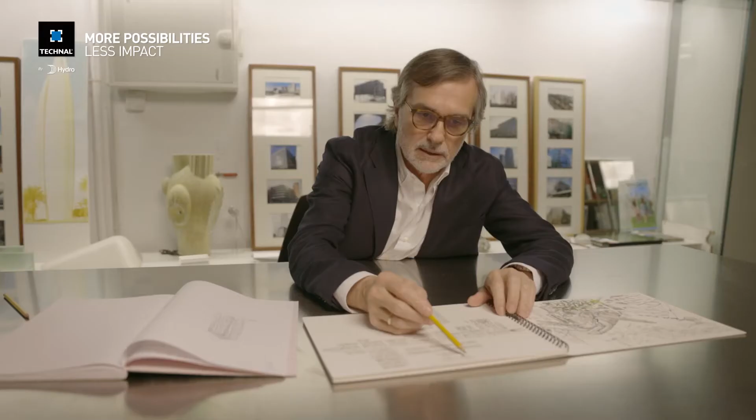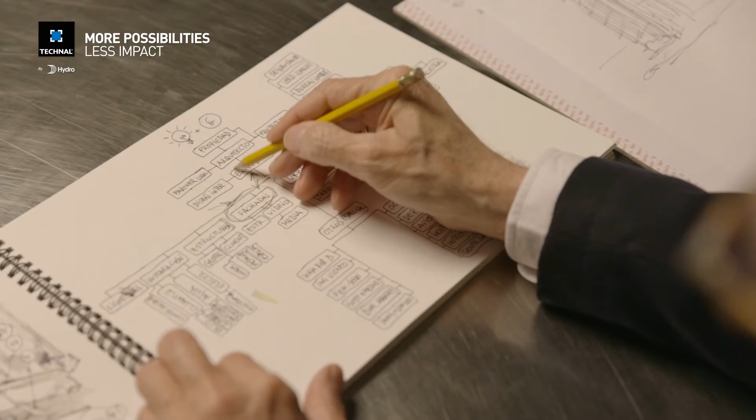First of all, I would like to introduce myself with a simple sentence. Yes, I'm an architect, but an architect with a special profile, because my team and I have developed more than 180 buildings over the last 30 years, making credible the ideas of others, sharing them by teaching in different universities, and especially drawing.

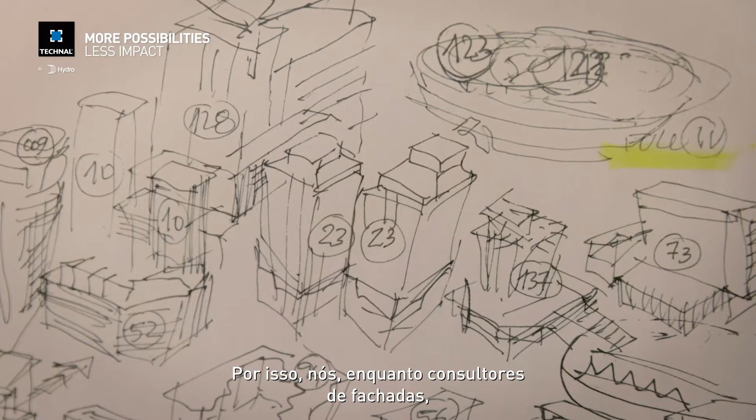We have a small and very dynamic office based in Barcelona, from where we offer facade consultancy for the best architects around the world, especially even Pritzker Prize winners. Usually, architects imagine the result and the engineers create the process, or explaining it another way, architects think what and engineers know how. So we, as facade consultants, move in an equidistant position between both, and our projects are developed with a simple philosophy: technique and form are the same.

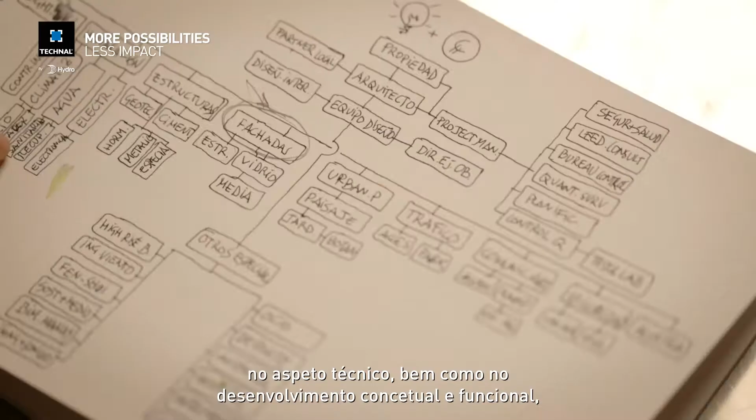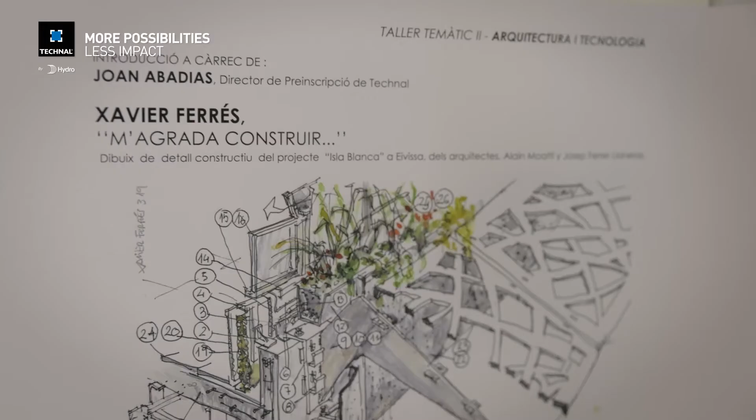Every day, more and more architecture studios focus their work on the level of definition of the facade, the technical aspect and the conceptual and functional development, leaving the detailing and the specific elements of the facade delegated to the technical specialists from the industry. So the most common way to face the problem of technology is to claim the support of brands that help us develop the most ambitious projects. Our role as consultant, in addition to the above, is to think and advise from the strategic development.

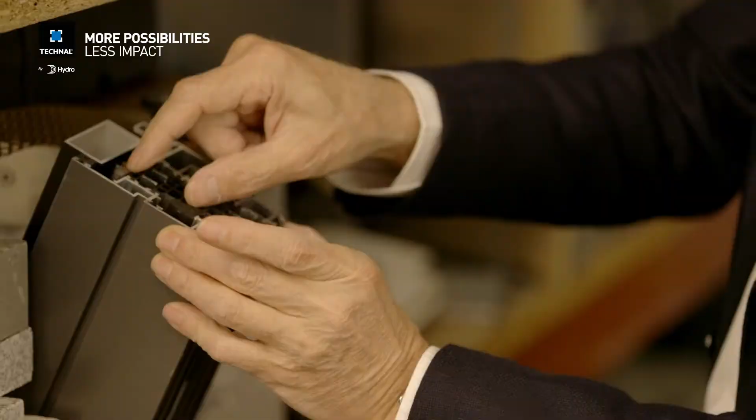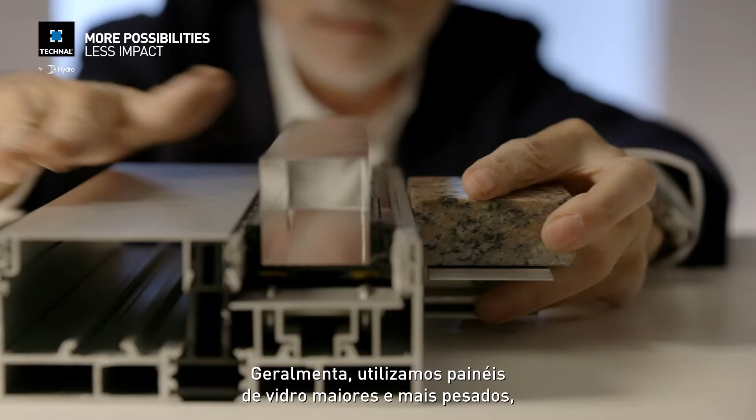The present leads us to consider energy as one of the engines of evolution, and this has been the case for decades. However, this contrasts with the need to work with large formats and glazed surfaces, so the so-called window-wall ratio increases, and the energy performance of the facade is in contradiction with the dimension of the transparent areas of the buildings. On the other hand, this need to increase sizes requires larger profile dimensions, engineered for bigger and heavier glass panels by means of innovative connections and reinforced glazing support.

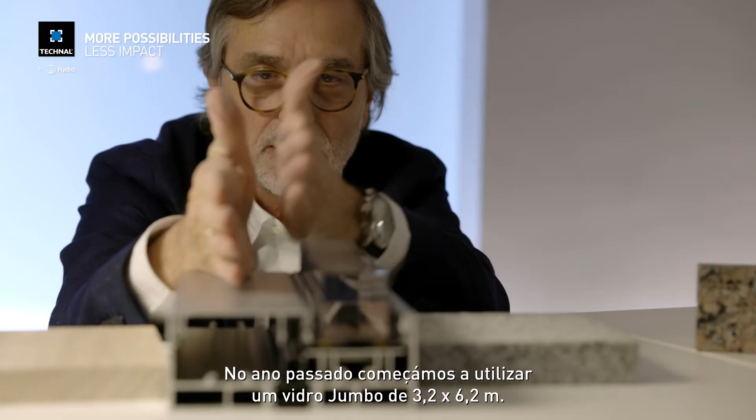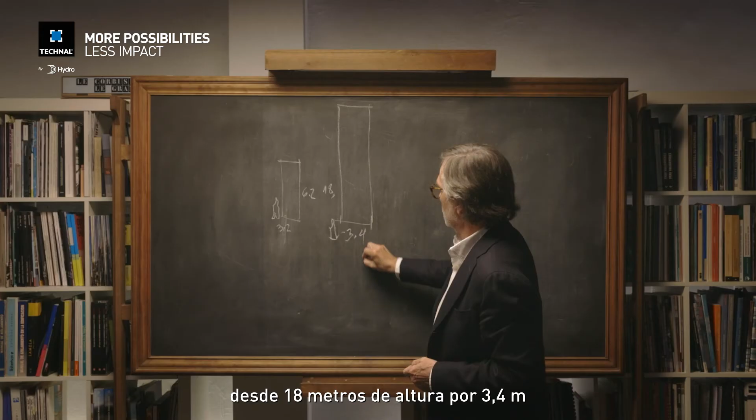Last year, we started with a jumbo glass of 3.2 by 6.2. Actually, we have, with different suppliers, glasses of 18 meters height by 3.4. So, obviously, we can use these sizes of glass.

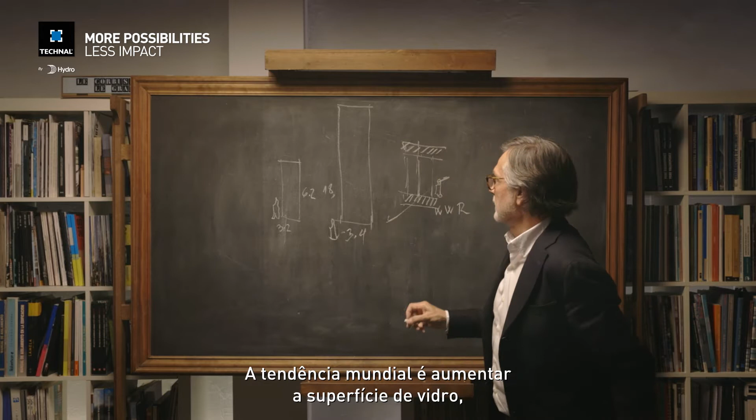The trend of buildings around the world is to increase the glass surface, but balancing with the window-wall ratio, because we need to balance the comfort of the users, contacting directly across the glass with the landscape, the sea, the rest of the city, in order to respect the rules and regulations in terms of energy savings.

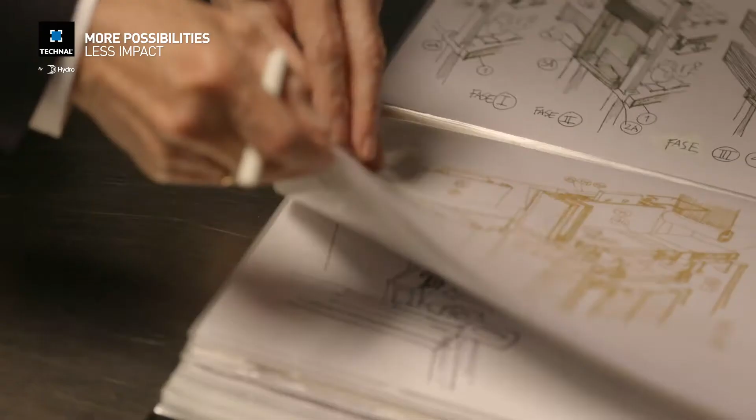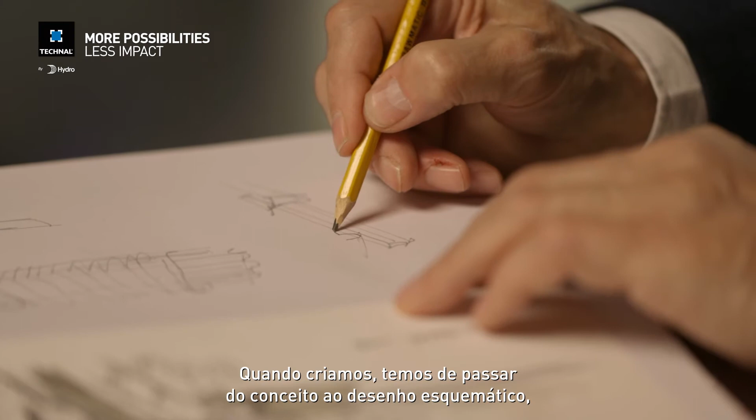The only way that I can explain my experience, my thought, my feeling about the technical decisions, the technical elements, is drawing. My brain is connected with my hand directly. When we are creating, we have to pass from the concept and schematic design to development and construction documents, trying to be proactive with the architects, usually our clients, in order to achieve the maximal fidelity to the original idea.

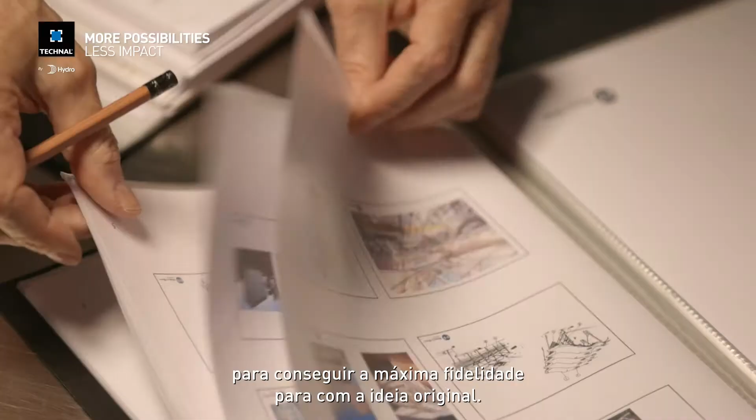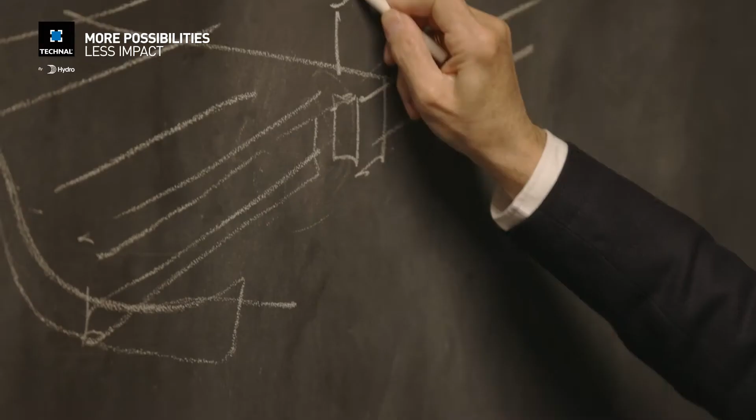For example, a building under construction in Barcelona, named Diagonal Zero. It's a multi-story building, I think 27 levels, with a special balcony. This is the original slab, because it's a huge modification of the building. This is the slab. This is the beam that we have to support. The level of the interior floor. This is the exterior floor, and we have a shape like this. This is a balcony, this is a terrace. The building is something like this.

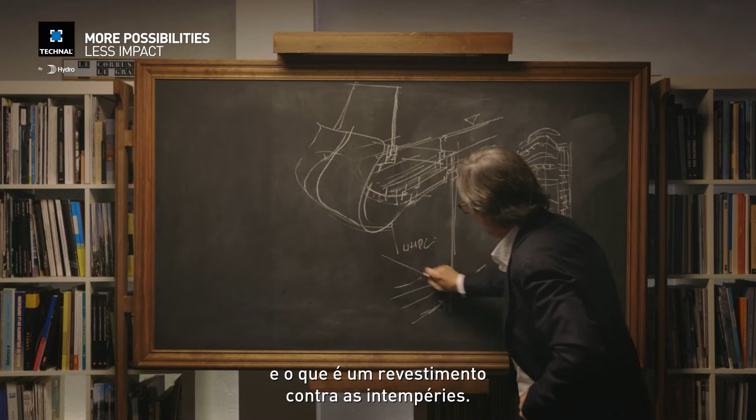It's more or less 110 meters, and all these balconies are here. And here, in the lateral facade, we have a typical curtain wall. It's a typical profile with spandrel and glass and windows, etc. The pass from here to here is very important to understand what happened. What is the slab? What is the structure? What is the weather line? In this case, with a sliding window, a huge one, maybe 2.50 meter height, and this is a part. I'd like to show this in color, but I think it's clear in order to understand what happens when we have to develop from the concept to the detail.

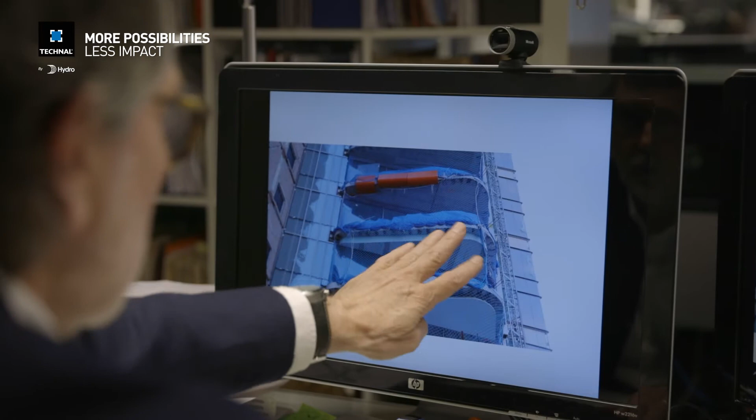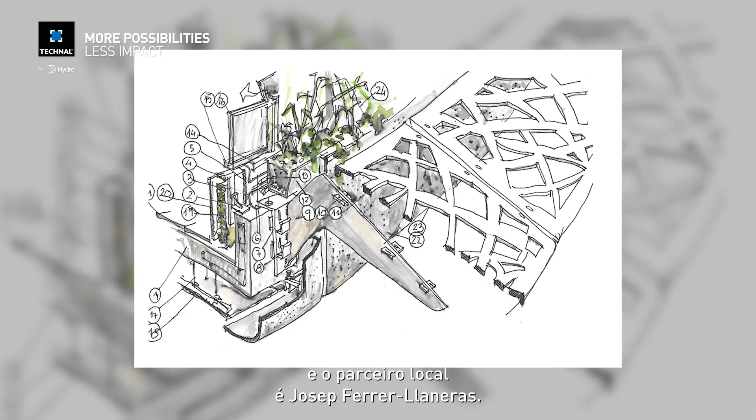The second case that I would like to share with you is a commercial and residential building in Ibiza, named Isla Blanca. The author is l'agence Moatti-Rivière de Paris. The project is led by Alain Moatti, and the local partner is Josep Ferrer-Llaneras. The main concept is a shadow device named voilette in French. It's an element qui vole.

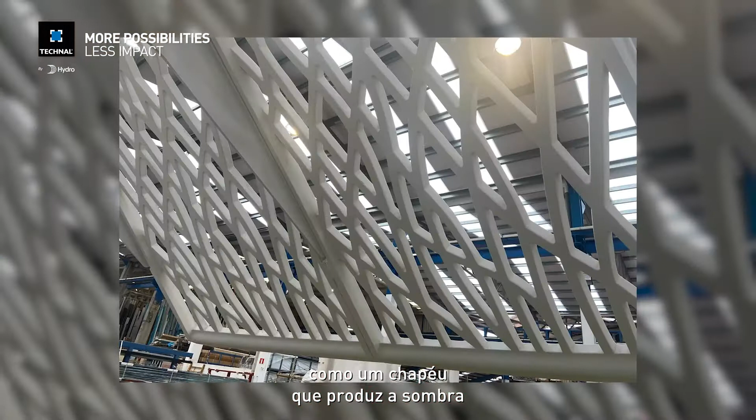So the building is like this, maybe 80 meters of length from here to here. To use this kind of material like a hat that produces the shadow on the face of a woman on the beach. And this element is something like this.

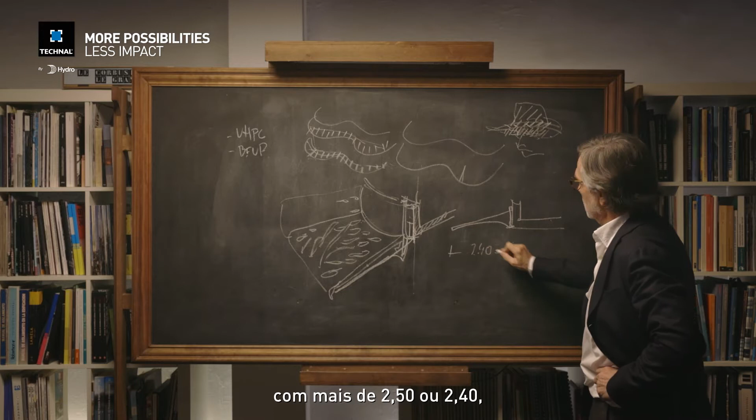You have there different molds because this is the main structure of the building, and here is hanged a huge element like this that supports these curves. So we have the structural element. This is a cantilever, more than 2.40, and this is the voilette in ultra high performance concrete that allows it to work perfectly like a shadow device.

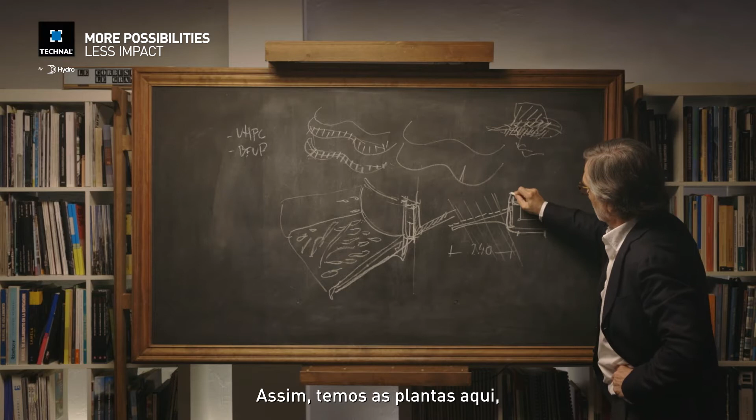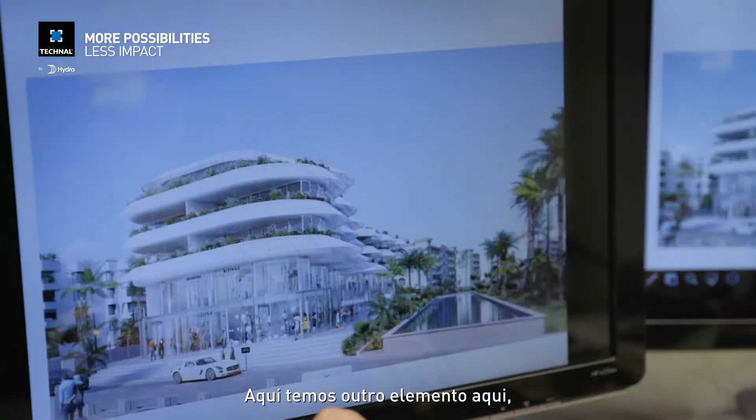So we have the vegetal elements here, and we have the windows, openables, etc. So from here, we have as well another element here that is the characteristic of this building.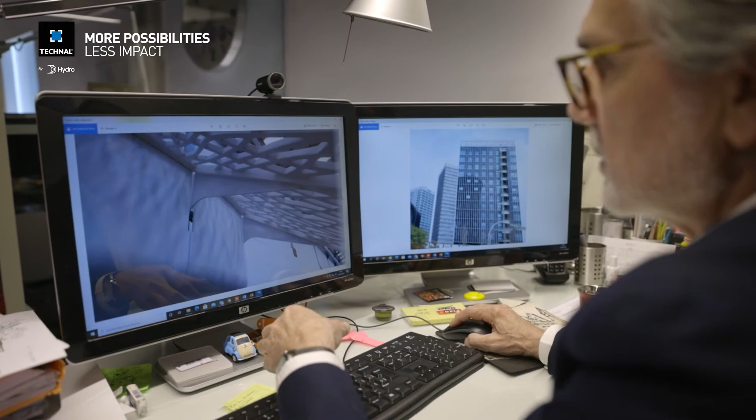The third case study is a multi-story hotel in l'Hospitalet, near Barcelona, in the Plaza Europa zone. It's a huge complex with a lot of buildings, hotels, office buildings, etc. This case is a project of Alonso y Balaguer. It's the most common and typical curtain wall facade. The building is a parallelogram like this, with a typical zone with machines and the HVAC equipment, etc.

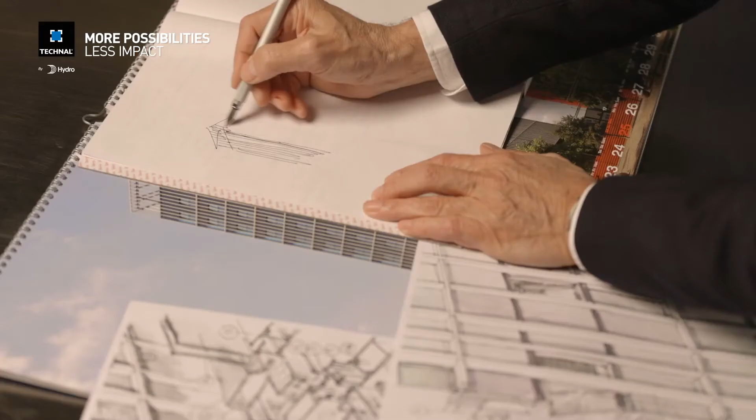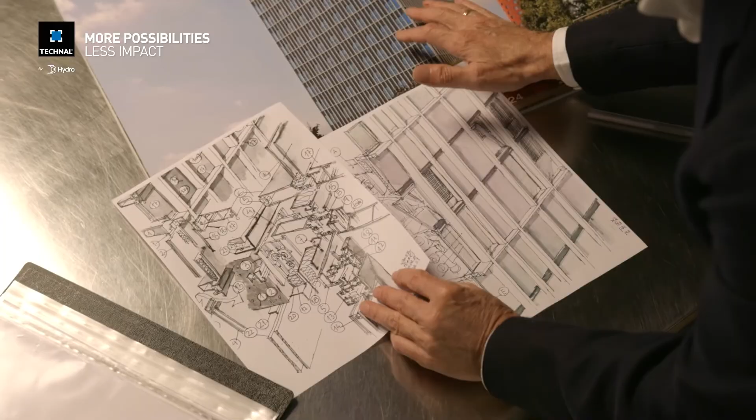And the rest of the facade is a grid, absolutely regular, with the profiles that I will explain, because in terms of technology it is very simple, but the effect is really very interesting. So we have these two profiles, and they are clipped to the main mullion of the facade. And that's it.

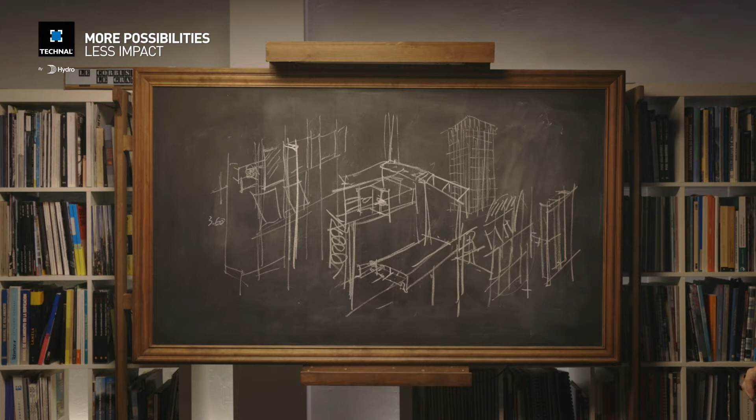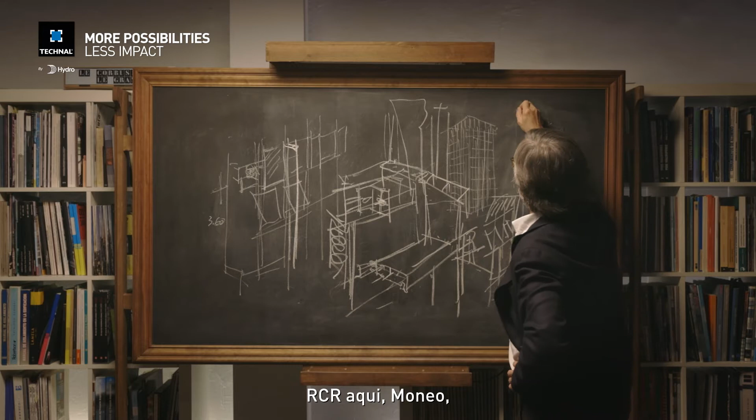So here we have the Toyo Ito building, the Nouvel building, RCR here as well, Moneo, and well, it is a very interesting complex that I invite you to visit, because if you are a passionate architect, I think that could be a good option to spend one day in order to know directly all this kind of different architecture.

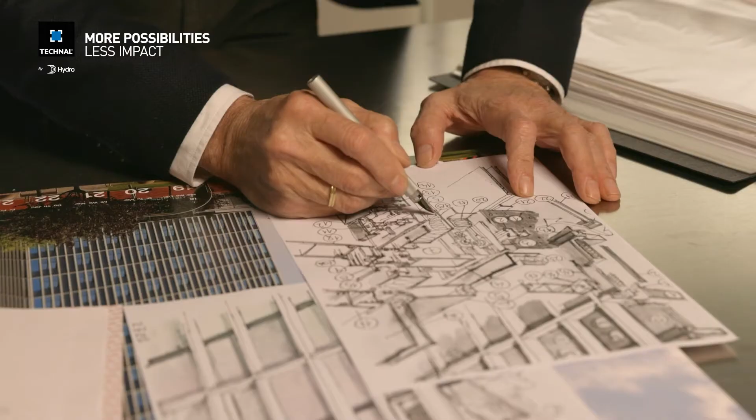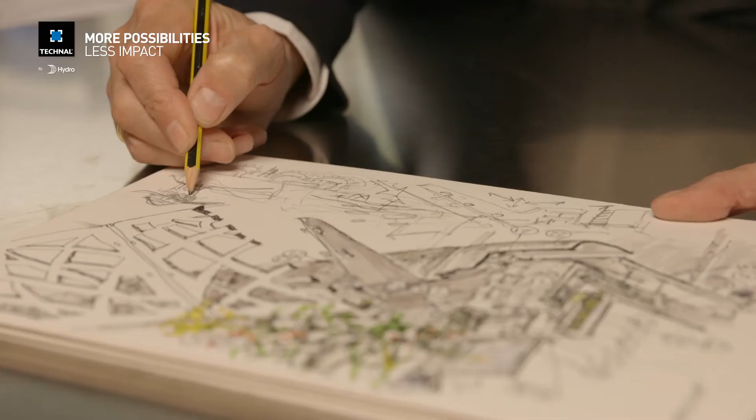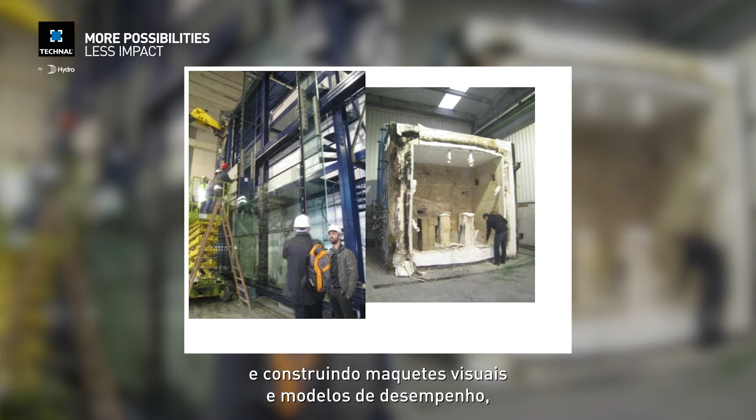As conclusion, I would like to share with you 5 thoughts as a summary. First of all, evolution that improves considering aspects from different points of view, like industry, architects, investors, owners, and consultants like us. Second, the extreme conditions of use are solved anticipating the problems and building samples and performance and visual mock-ups that are tested by the owners to approve the final solution, in order to check the transparency, the vibration, all the aspects that we have to control by using prototypes and mock-ups in real size.

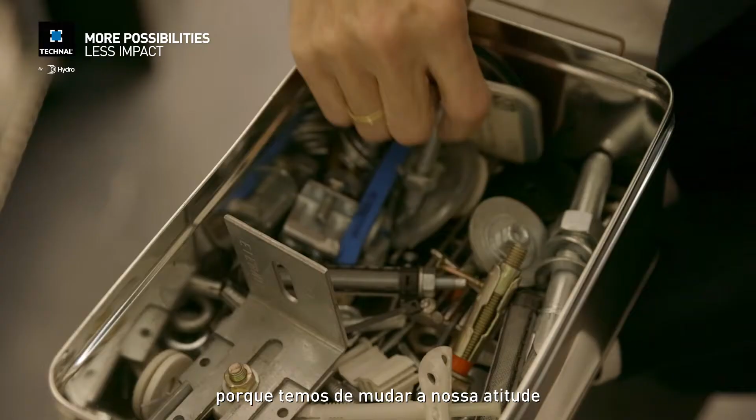Third, we have to look for collaboration with international brands that belong to a big and well-known group. It is the best option to guarantee a long experience of success. The fourth topic that I think is important to sum up this small explanation is to involve the clients and users in the project. Planning, commissioning, exploitation, maintenance, life and recycling of the building as a way of working, because we have to change our attitude about the design and use of the buildings.

And finally, we have to work from a global perspective, making it essential to combine the most diverse languages, cultures, rules and regulations, economic and social criteria with the most attractive architectural proposals. And for us, it's a privilege to be able to create a space for a better future.

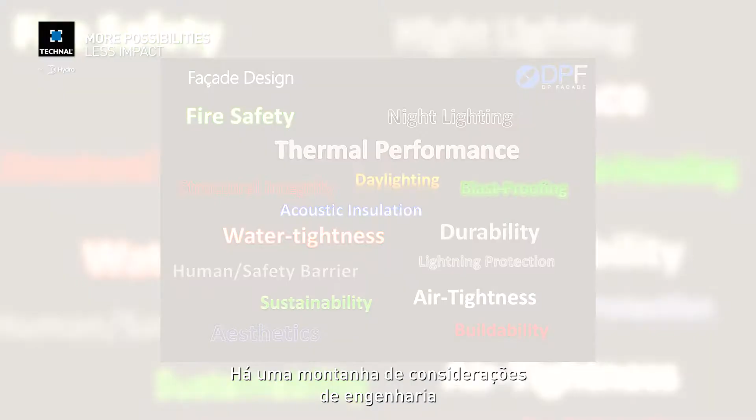We also need to think as an engineer, because it needs to hold itself up, it needs to be structurally sound, it needs to be thermally efficient. There's a whole bunch of engineering considerations that go into creating the perfect facade. We also then need to think like the fabricator, the person who's actually going to implement this. It needs to be something that can be fabricated easily, installed easily, transported. So you really need to wear different hats and think like a bunch of different people.

This is why the teams of facade consultants that work with me come from different backgrounds, different training. Some are architects, some are engineers, some are specialists in construction. There's really different profiles that need to come together to make it really happen.

So far, over the past 20 odd years, I've worked on buildings that were low-rise but highly complicated mega projects like the Dubai Mall or Resorts World at Sentosa and Universal Studios. Low-rise doesn't mean easy. It's generally actually more complicated because you work with multiple systems, multiple materials, from glass to aluminum to steel, which are very classic facade materials. But then you also throw in stone, GRC, GRP, ceramics, and really a plethora of other materials and other systems that complicate matters beyond recognition.

Working on high-rise, the challenges can be quite different because the facade is more repetitive. You repeat it on multiple floors, but it doesn't mean that it's easy either. Other considerations come into play, like building movement; tolerances over the super high-rise buildings can be quite challenging to take into account in our designs. Different projects, different locations, different considerations come into play, whether it's seismic activity, whether it's snow loading in temperate countries, whether it's extreme heats.

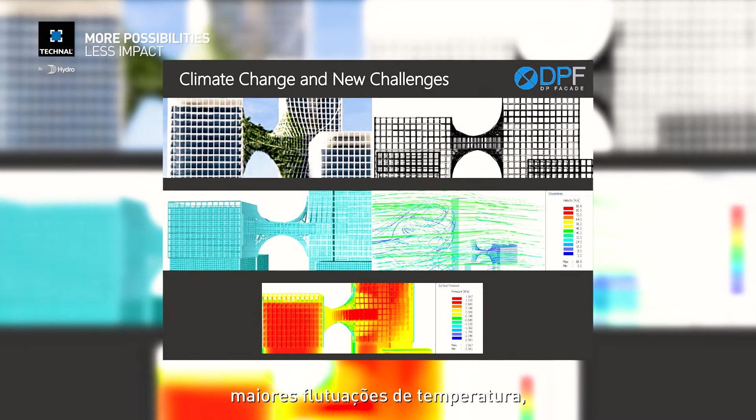This is really one aspect I wanted to touch on briefly now, which is what's happening with climate change. With climate change, what we're having now is more extreme weather, greater winds, greater temperature fluctuations, a whole bunch of additional considerations that make designing facades much more complicated and that require much greater care from the facade consultant who's handling the facade.

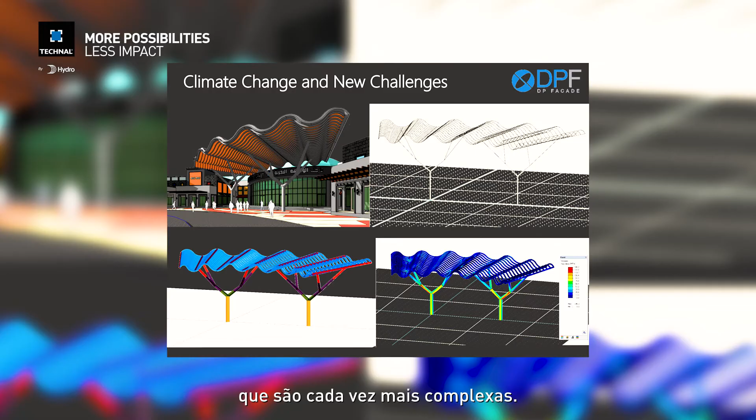On top of that, to make matters worse in a way, or maybe to make matters more interesting, that's how I'd like to think about it, architects are designing facades that are increasingly complex. It's almost like a competition, who's going to get the ideas that outdo the predecessor, so to speak. And we get complex geometries, we get various aspects in the design of facades that really challenge us to bring our best when we work on this project.

To do this, we've had to develop or acquire a bunch of new tools that we did not traditionally use. When I started as a young facade engineer, I used to do everything by hand, whether it's the sketches, whether it's the calculations, everything was done by hand. And today we are using technologies such as BIM, such as parametric design, using dedicated engineering software. We make use of 3D rapid prototyping to test ideas, to see, does it even make sense? Is it buildable?

We've even developed tools that are not on the market, something we call IVMU, which is an interactive visual mock-up, which allows the designers, so the engineers, the architects, the owners, the building developers, to use virtual reality goggles to visualize in real time what their buildings are going to look like, what their facades are going to look like, and to make changes in real time. And this is really a fantastic tool that we've developed over the past couple of years, and that really changes our approach to designing facades, especially on these complicated buildings with multiple materials, complex geometries.

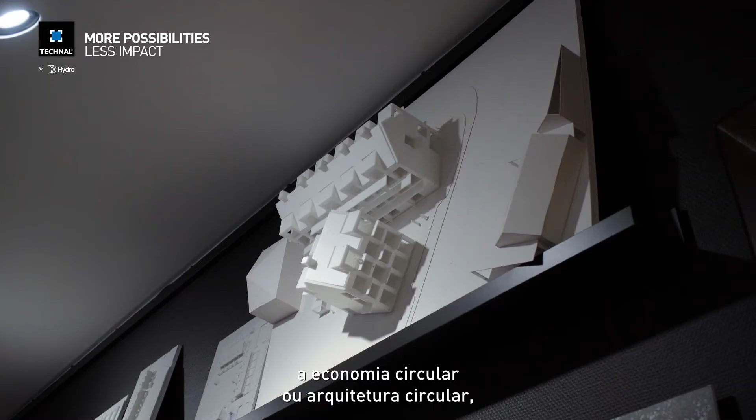The six focus areas are carbon emission. We also talk about climate smart architecture. The next one is circular economy or circular architecture. And then we work focused with biodiversity. On the social sustainability side, we work with safe environments, health and well-being, and then placemaking.

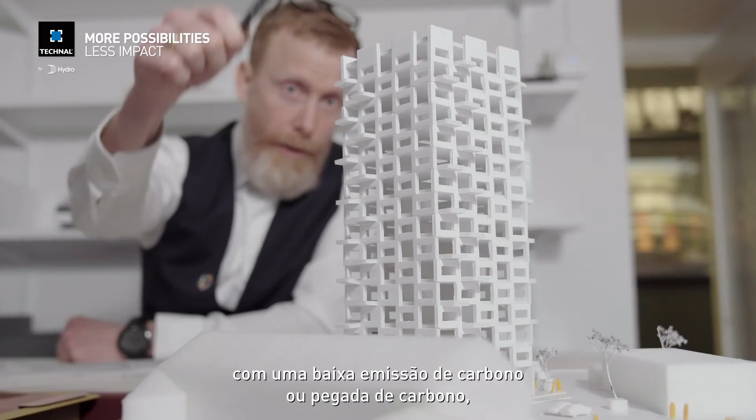So if we start with climate smart architecture or carbon emission as focus, we work very much on designing buildings with a low carbon emission or carbon footprint. And that is both from operations when it comes to energy efficiency, but also when it comes to embodied carbon, which means the carbon that is emitted when producing the materials that go into a building.

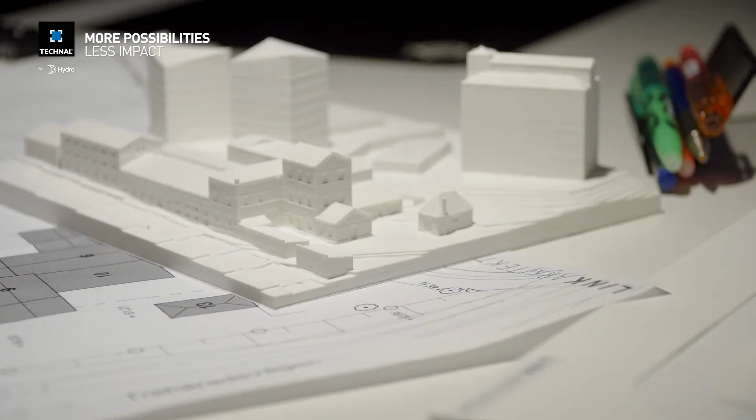If we then talk about circular economy and circular architecture, it's very much about designing resource efficient, securing that we don't use resources unnecessarily, but also about taking care of the buildings that are already built. So transforming or renovating buildings before we start looking at producing new buildings. It's also about reuse and recycling of materials, and also designing for circularity, preparing our buildings for a future that is more circular than it is today.

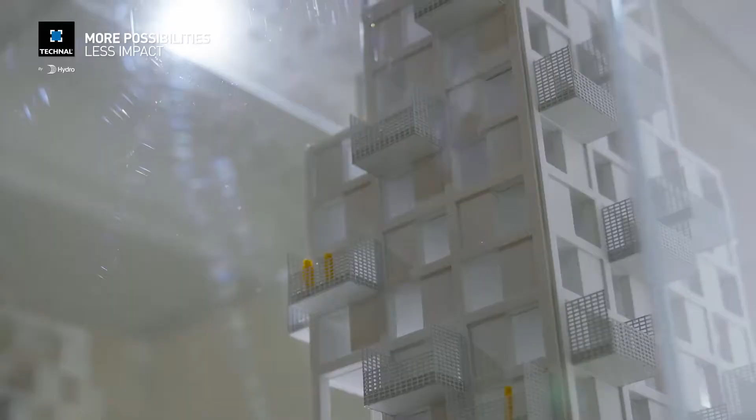And then we can talk a little bit about biodiversity. We know that the built environment and producing materials and constructing the buildings have a great negative impact on biodiversity. So when working with the built environment, it's really important to look at biodiversity and see how we, when we construct our buildings, can choose materials that have a low impact on biodiversity, and also work with biodiversity when we create the built environments within the cities.

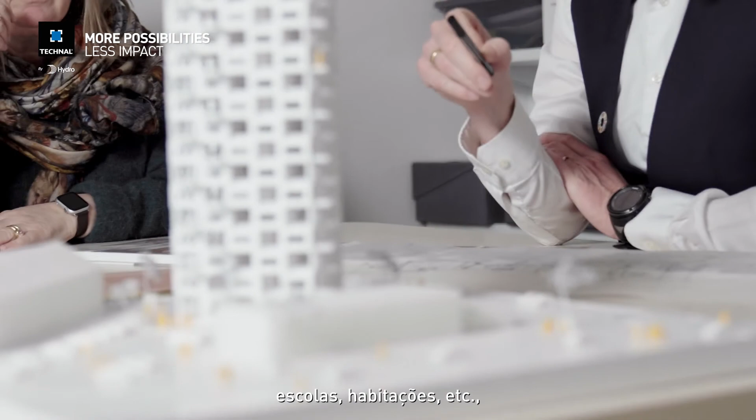If we then talk a little bit about the social sustainability that we work with, one of the areas is safe environments. We know that creating safety within, for example, residential areas, schools, housing, etc., creates people that feel safe and, for example in schools, can take in their education better. They come to school. I mean, not being safe at school can make students not come to school. So safety is a very important part of our contribution to social sustainability.

And then we can talk a little about health and well-being. That is an important part if you work with offices, hospitals, schools, also residential areas. If you can support a living that is healthy and supports well-being, then you can solve or contribute positively to some societal challenges. We know stress is an area in at least the Western world that is problematic. We know the different heart diseases and so on.

And then the last one is about placemaking, and that is both about safe environment but also about interesting environments, places where you want to stay, places where diverse people can come and meet, and you can feel the inclusiveness because you want to stay there, you want to meet other people.

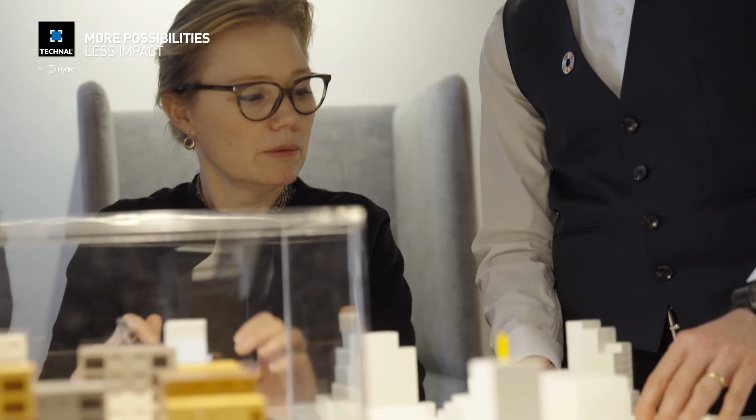When it comes to the architect's role in relation to sustainability and sustainable development, we play an important role because we usually get in pretty early in the processes and the project development, and thereby we can be part of setting a vision that fully integrates sustainability so that it can be a base for decisions made during the design and also during the construction phase.

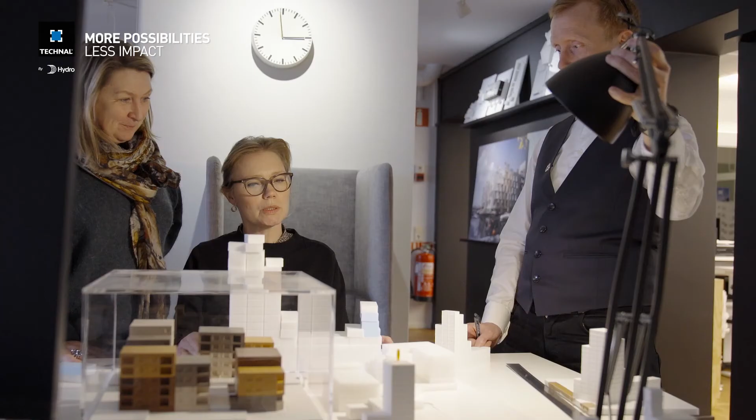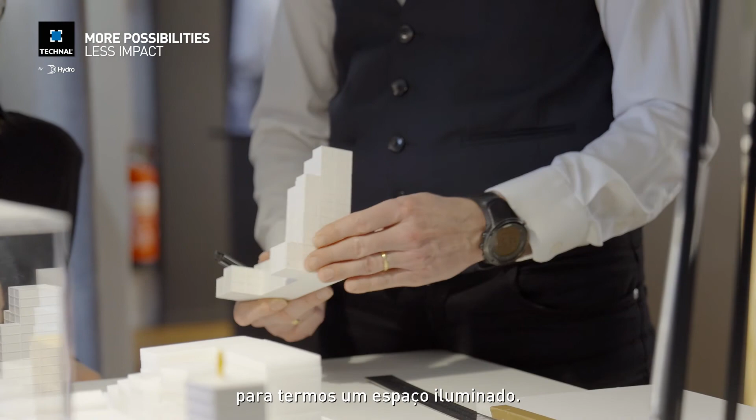And then we also play a very important role when it comes to the actual design. So through the design we can work with, for example, indoor environment when it comes to designing so that daylight comes into the building, that you have a good view of the scenery, and also working with designing so that we minimize the negative impact of the built environment in relation to resource usage or carbon emission and stuff like that.

And then when we come to looking at choices that we make, for example, in relation to materials, we have a great possibility to influence the final positive impact in relation to sustainability by choosing materials that we know can lower, for example, the carbon emission, the carbon footprint of the building, or adding to some qualities in relation to indoor environment.

Well, if we talk about materials, we know that the construction industry and the producing materials have a great negative impact on the environment. It's everything from polluting the air and the water. It's about using resources, virgin resources, that are rare or scarce or limited. So we have to make sure that we don't use them too much, because then we'll run out of them.

It's also about, we know, for example, that 80% of all drinking water goes into producing different materials. We know that 80% of the loss of biodiversity is coming from producing materials, foods, etc. So it's a very important part when choosing materials that we look upon materials not only from a cost perspective and a quality perspective, but also from a sustainability perspective, and always try to find the materials that give us the most bang for the buck, the most positive impact in relation to the investment that we do.